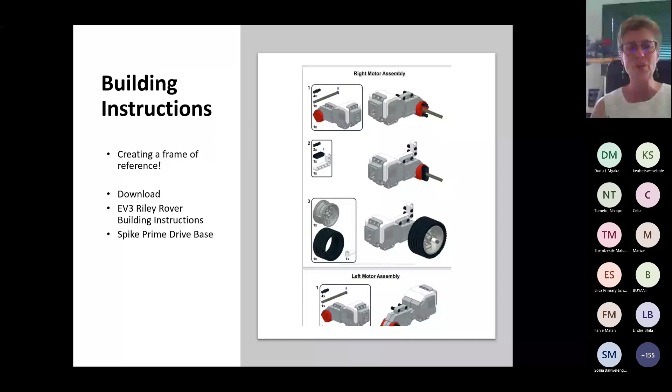All right, so now we're going to build a robot. But for this to happen, we have to assume that you have a kit. We don't want to delay your building enthusiasm though, so we're introducing some virtual design and building tools, almost like a CAD system.

I'm not sure how many of you are familiar with the following: one is Lego Digital Designer. What you'll find is that Lego Digital Designer was used for a long time to teach learners to design something and then build it. But they also used it to re-engineer - learners would design a really cool attachment for their robot, and then we'd get them to put that design into the system so they could reverse engineer their design and have building instructions for something they had designed themselves.

Bricklink Studio is the new kid on the block. And then there's Tinkercad - as I'm looking at this, I'm thinking we need to actually have Tinkercad as a totally separate workshop. I must make a note of that on my list here.

So Lego Digital Designer, you can download it. What we're going to show you tomorrow is a program called Virtual Robotics Toolkit, or VRT - please don't download it yet. I've got a key for you so you can test it, or do a trial version. It's a lot of fun, the Virtual Robotics Toolkit, because you can also play with the robot.

Just to show you around, this is the kind of environment for Lego Digital Designer, but you can also download other people's designs. So Builder Dude 35 is a guy who was a young guy about 7 years ago - he's grown up, and he's a great contributor to this online community. You can see there's a plethora of examples of designs and things you can build.

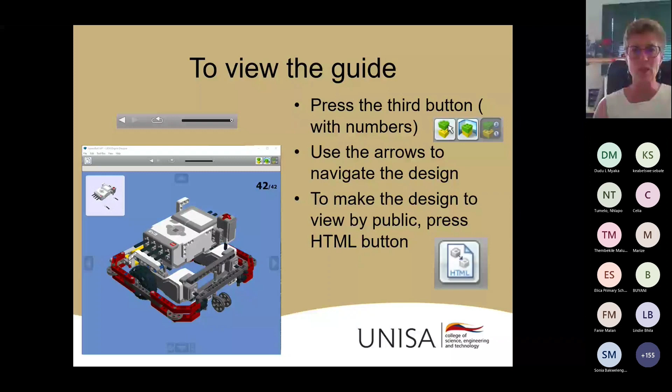So that's kind of what it would be. You'd save it, and then you've got it, and you can share it, and have an example of what you've built. That's Lego Digital Designer, and you can share it as well. But what we're going to demonstrate today, I'm hoping Casper is still on the call, he's going to demonstrate Bricklink Studio.

You can import Spike Prime parts as well, and these are interchangeable, so you can read and write Lego Digital Designer files, edit it, and share your designs. Casper, I'm going to stop here and say this is where we are.

This is Bricklink Studio if you want to go and download it and install it on your computer. This is what Casper is going to show you, how to manipulate electronic things. And there's the Prime lessons - a whole lot of lessons you can follow under Prime lessons if you want more information.

Okay, so Casper is now going to give us a Bricklink Studio demonstration to build a robot virtually. Then tomorrow we're going to deal with programming the robots, the different options. And in the late session, the Unit 4 session, I'm going to show you where to find more resources and how to deal with all these resources without being overwhelmed. All right, I'm going to pause now, and Casper, it's over to you.

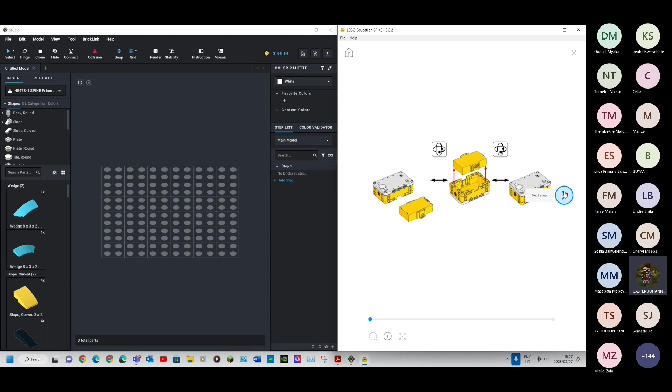So what we're going to do is build a small robot, the driving base one. This is now the instructions that Dr. Gijs was talking about, and all we're going to do is follow these instructions and build the robot. So the first part is we need a horizontal beam. Now we're just going to look through here on the left side to find the correct beam. Here we have it.

Okay, and we can use our mouse to move the screen around as we see fit and how we need to do it and how we want to see it.

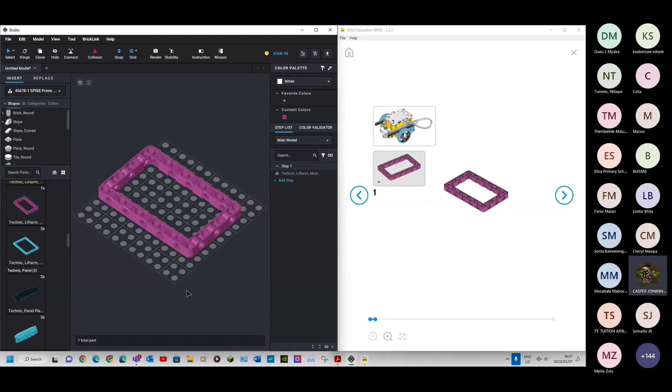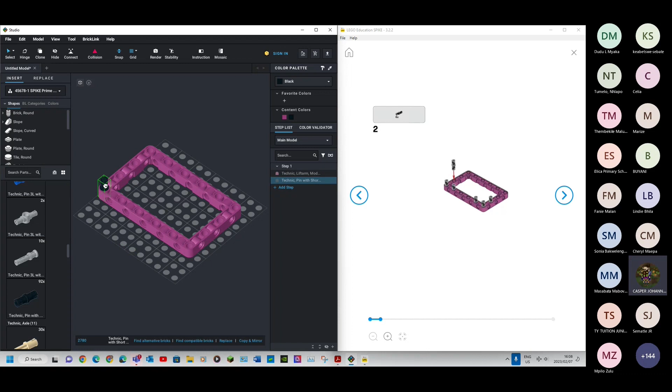So we just press here, and then you will see we have 93 connectors in this set. We just press on it, we drag them, and we use the arrow keys to move it, to rotate it in the correct position. And then all we do right now is we redo this step 6 times as the instructions show us, it needs to be on this side here and on this side here.

Okay, and then also one thing that is nice about this program is if your learners create a robot from their own design and they want to save that design, they can now, on this side, it shows you what that part is and in what step you did it. So you can add steps at each row, at each point in time, to show how we built this robot, step by step.

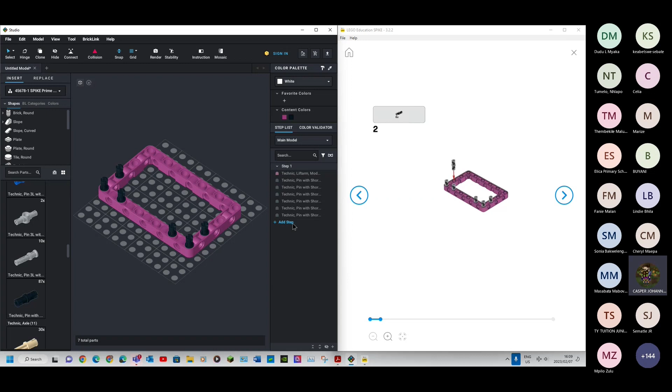Okay, now the next part is we just need to add our motors. And this is another part that all the learners will go on and do in real life with a real robot and with all the pieces. So one person will be looking for the pieces, and then the other learners will go and connect these pieces to each other in the correct positions.

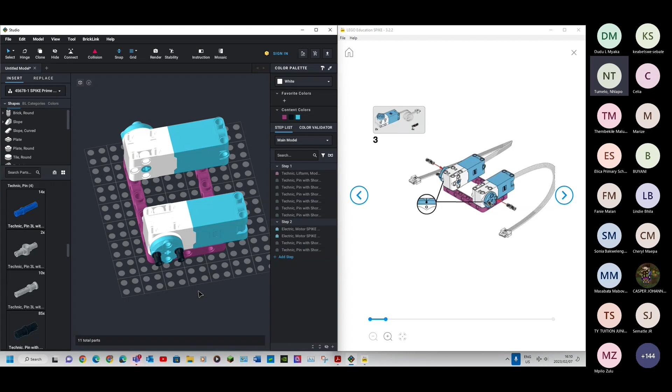No, so what you have to do is we have to press this button here, and then we have to say configure. And then we have to go and look for the number of the set that we want to use. So for example, the Spike Prime is 45678. So then we go and say choose a new palette, import from an official Lego set. And then we just add that number that we just got. And then it will show you, after it's loading, what that set is. So it shows me it is a Spike Prime. Press on it and we import it. Import. All right, and then it shows you if there was any problems downloading that program or not. All right, sweet.

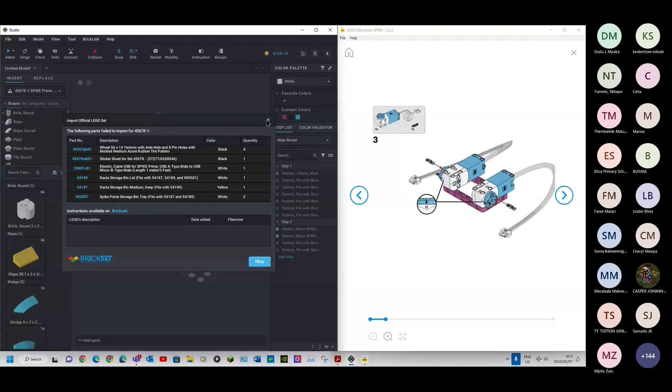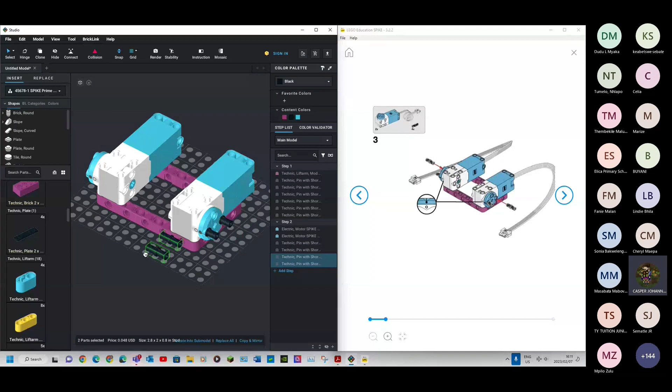Okay, so there are a few shortcuts that we can use. We can use the control key, and then we can select multiple parts at the same time. And we can say Control C to copy and Control V to paste. And then we can select multiple and connect them all together at the same place that we want to do, because we can see they need to be in the following spots.

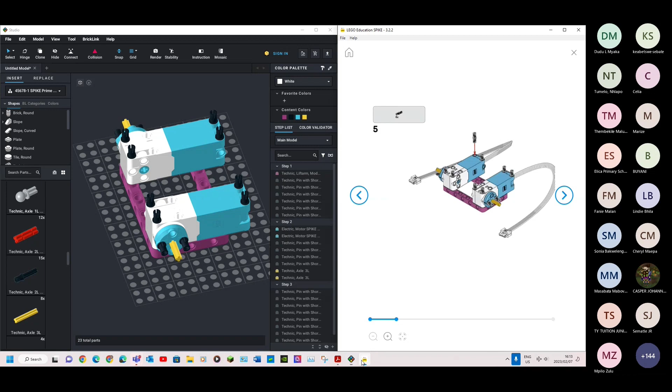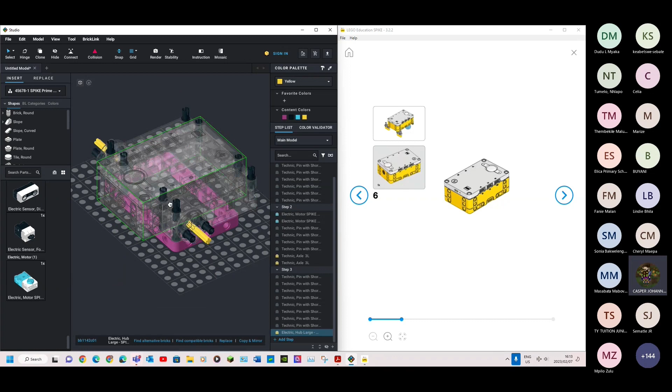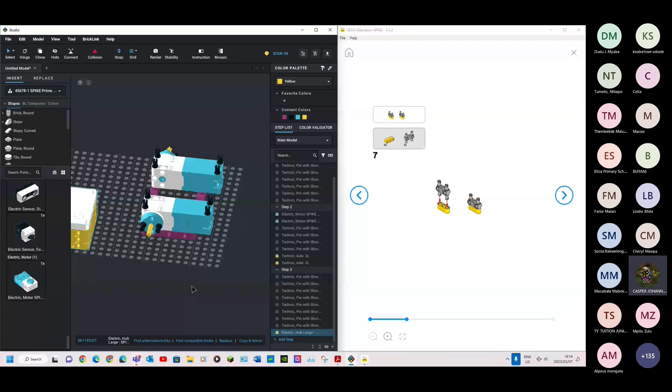Go ahead, pleasure. So we just continue following the instructions. This is just for if you don't have this robot at the same time, we can continue pasting it. This is also nice about this program - it shows you cannot place the robot there because it's conflicting with something already in that spot. We need to try and put this part here. So the next step is we need to start with the other side of the brick. I'm going to move this to the one side of our designing table and get our robots underneath.

Okay, so the next part is we need 3 beams with 2 special connectors. Let's find those, okay, correct while you pass here. Looking for those 3 beams with 2 special connectors, I see Hlingiwe's hand was up. Go ahead, Hlingiwe.

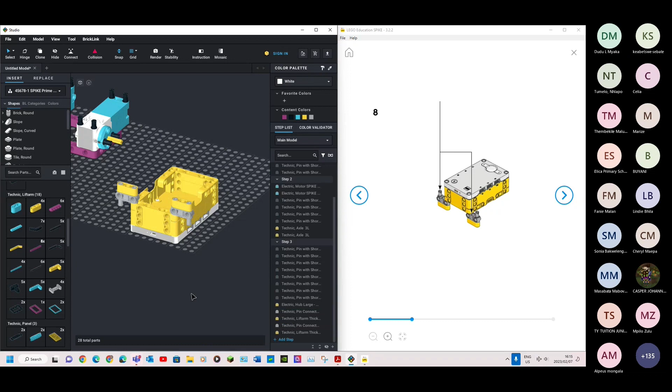Oh okay, so that one you get on hands-on technologies. Okay, okay yes, I'll put it in the chat. Thank you. All right, you can continue, Meneer Johannes.

Thank you. So now I'm selecting - I'm using, because of my experience, I already know I can see there are a few parts that we need to move. So what I'm doing is using the control function and selecting multiple parts, copying them and pasting them into their correct positions. When you want to select multiple, you hold in your left button and select everything, and it creates a square and selects everything in that area for you. Then you can see how it needs to go. So the next part is we need to add another beam with the caster ball for maneuvering.

Is there any questions so far on this software? So far so good.

You did indicate that - oh wait, let me go to the chat box. Sorry, I see there's a chat saying our 4-year-old is watching with me and getting excited, it's Legos. Thank you so much for that. And I see P. Muller says, can you use BrickLink Studio as a virtual substitute for robotics kit until you are able to get the actual SPIKE Prime kits in class?

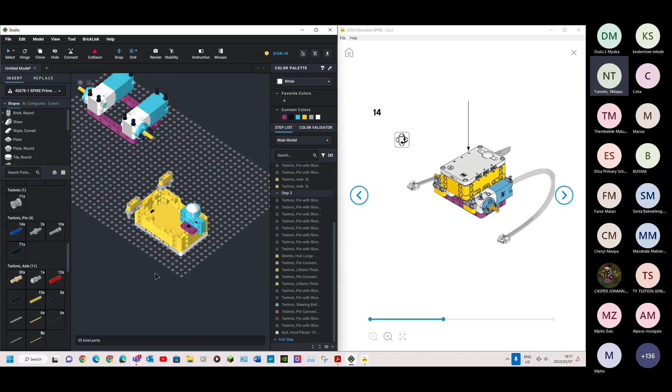Yes, definitely yes. And I see Wiseman Ngobo says, is it possible to write down those instructions starting from downloading Bricklink? I think it's simpler, Mr. Ngobo, because you simply use the link that Casper indicated and then you can take it from there. It's not a train smash, but let us know if it's difficult on your side.

And I see Zintle says unfortunately on my side the screen is black but I can hear Casper clearly. So for the likes of Zintle and others struggling due to network connectivity, please note the recording will be shared tomorrow on the YouTube link.

And then I see Penny says, is Bricklink free or is there paid content? Yes, so it is free to use, and the nice thing about it is if you search online by going onto Google, you can get multiple designs that you can open in Bricklink to see them.

There's one thing I want to maybe add. If you go underneath the main part, it shows you all the different Lego parts that were ever created. So you can even search something like a figure, and then you can create your own Lego men - it shows you how, for example, the small headed one. You can create your own figures and any other Lego pieces you can think of. It's lots of fun if you want to play around with it.

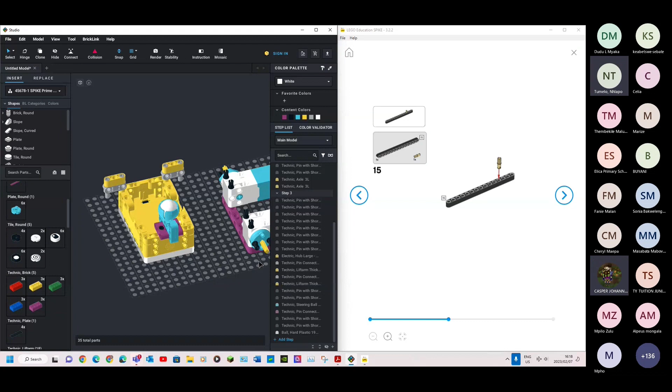Okay, so the next part - I just wanted to show you all. The next part is we need to take the rig on this side and move it over to the side on the right-hand side onto the 2 motors. We'll just make this a big screen.

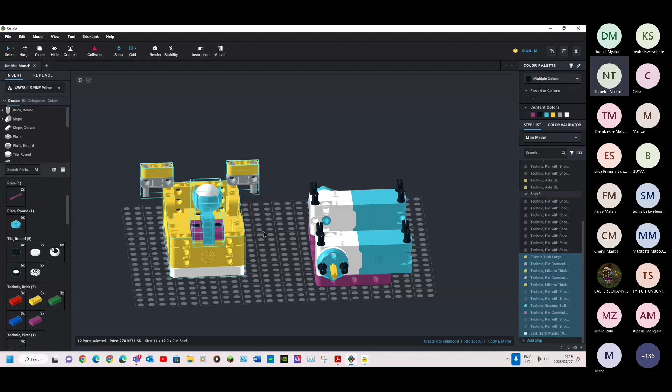Okay, while you're creating a big screen there, I see Dr. Kho's hand was up. Okay, yes Doctor? I think it's also important, Casper - Casper's now building a robot, but sometimes the learners also need to get used to building attachments.

Building a robot is really exciting, but there's more to it than just building a robot. You can build attachments, passive attachments, powered attachments. There's this whole range of designs that learners can grapple with, and each can grapple with their own design. The application is immense. It also gets learners to think in 3 dimensions.

Thanks, Casper. Carry on. Sorry.

That's fine. Plus, the one thing that is also nice is you can have an entire digital library of all your old robots. If you want to remember how you built that robot, or if there was something special about it you wanted to remember, you can take this program and create your own entire steps on how you built it. You can even add comments on what was this step, or anything you want to remember about that robot, or any special attachments you created that worked extremely well.

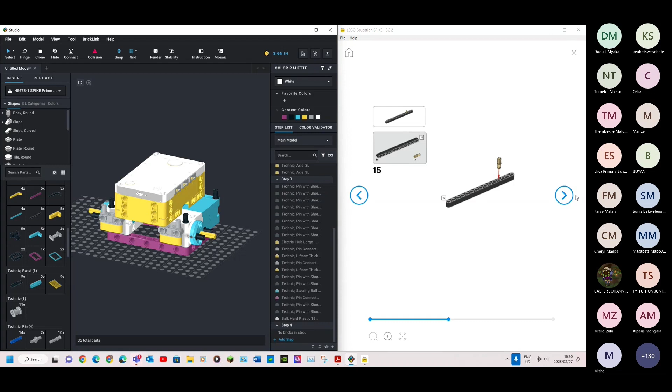The only thing I'm going to skip now is the wiring, because this program doesn't show the wires, unfortunately. So we're just going to skip those 2 steps.

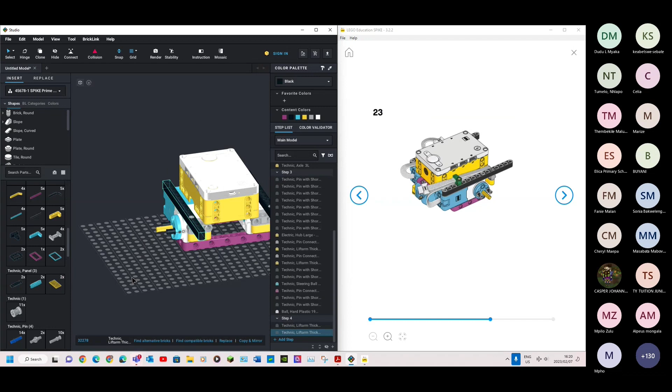The only thing we still need to add is our wheels, and then our robot is done. There we go. Easy peasy.

Thanks, Casper. Well done. Woohoo!

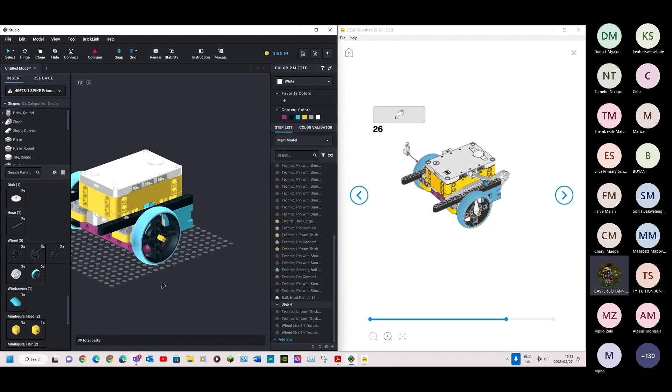And this is now our robot, a small robot that we just built using the building instructions. And then we can find it, and then we built it now.

Now the most important part of every single programming, or even in real life with our computers, we need to save our program. So we go to File, Save As, and we say this was the drive robot, it was just the drive. And then we save, and that program is saved forever.

Then we have our small robot that we just built.

Awesome. Awesome. All right. Thank you so much, Meneer Johannes. You wanted to say something, Dr. Gous? No, I'm just inspired. It's just so easy. All right.

Yes, Meneer Johannes, can I recap a bit? Yes, I was just going to show you another robot while you recap. Continue. All right, so from what you have taught us here is that you can simply go and download BrickLink Studio for free. That's number 1, yes?

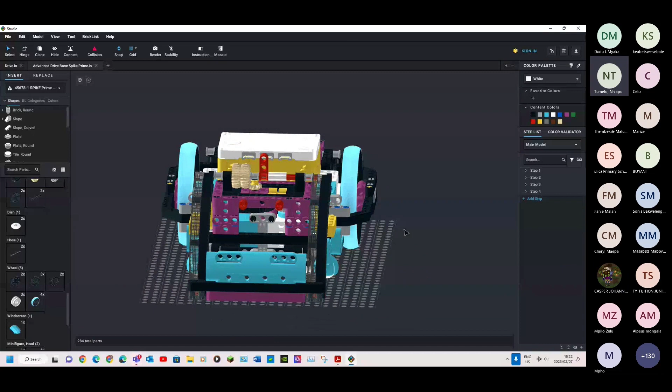Yes. And number 2, you said in order for one to have SPIKE Prime on this software, where do we get it?

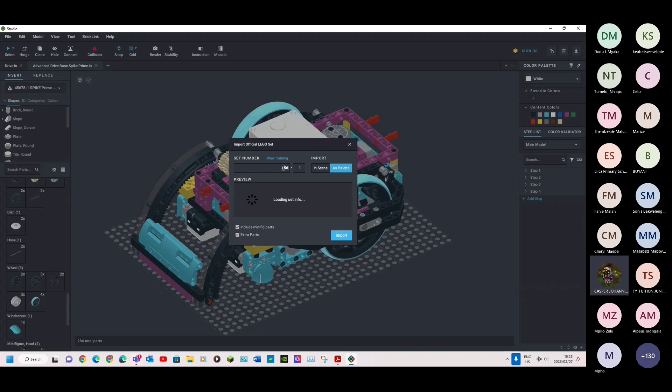Okay, so what we do is we Google this SPIKE Prime, and then we get the number, 45678. Then we just go here to configure, and we say add a new palette. The next part is import an official Lego set. Then we enter the number we want, 45678. And then we'll get the entire set. You don't even need to enter the 1 because it's always there. We just say import, and it will automatically import your entire set into this area here.

And we just press on that button and it will take us straight to our set.

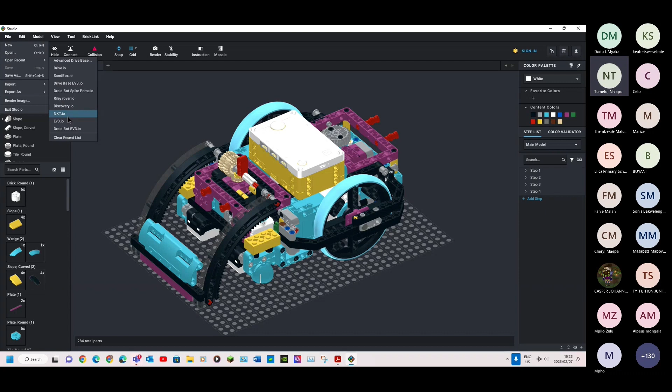All right, do you have any questions regarding Casper's presentation? Or otherwise, Casper, you can continue in the meantime.

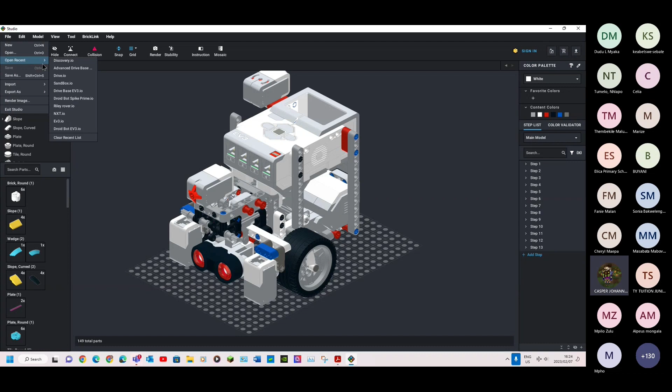Yeah, this is, for example, one of the EV3, one of the previous robots that we can just take. I think I still have an NXT. So one of the first robots that were built of the first sets here we have, and we just got it right to take the design of that robot and convert it into an electronic file so that we can always remember how to use this robot or how it was built.

The robot's name is Mozart, by the way. Yes.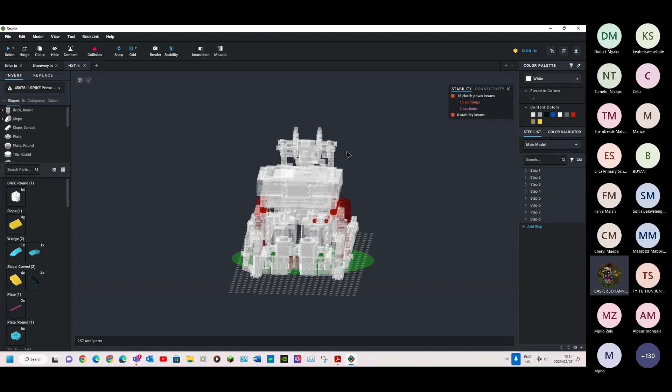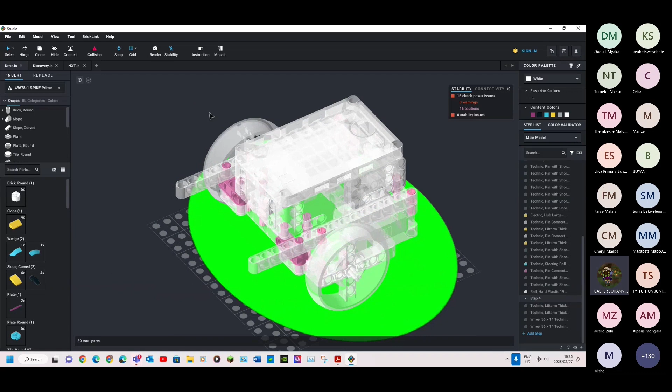Yes, and then also we have multiple functions here that we rarely use. For example, I wouldn't suggest a person very new to Bricklink use the render or the stability button, because the stability button will just check for you where the stability problems are in your robot. For example, it sees a problem with the wheels and some of the connectors, but with the robot we just built, it doesn't see any problems with stability. The render button is just to create photos, but I really wouldn't suggest anybody use that button because it does take a lot of your PC's computing power.

And unfortunately it's very draining. But otherwise, the only ones that you would use is either the Spike, or if you want to use the EV3, you can type in 45544 and you'll get the core set for the EV3, and 45678 for the Spike.

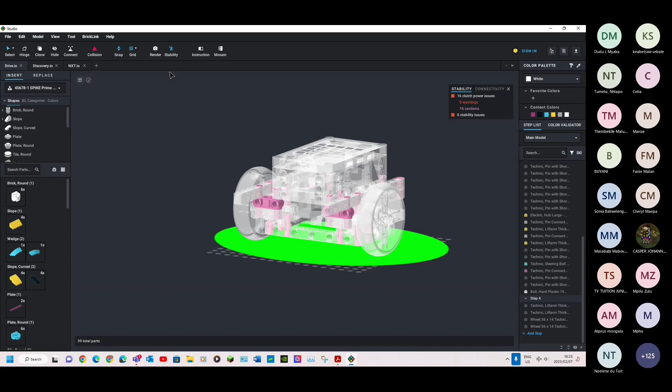Hi, it's Pio. I just wanted to find out if it is possible for one to get this software on a phone, or is it only on laptops and computers? I only know of the computers and the laptop, unfortunately. I don't know if it's on the cell phone yet for the Bricklink, but the programming for the robots is on the cell phone also.

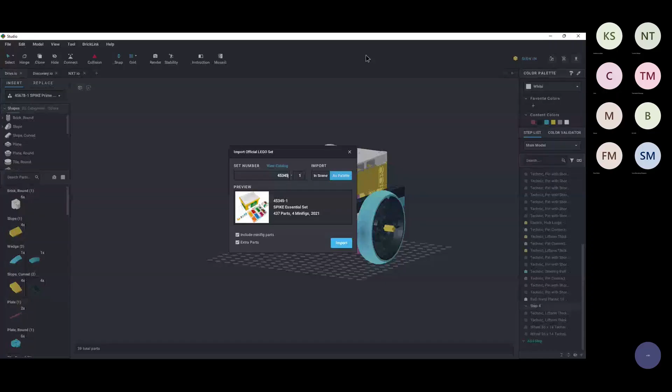Let me just share my window. Can you see my screen? Yes. Okay, so if you type in this, it will give you the Spike Essential set. Yay, all right. So this one here is just to show if there was any problems with some of the parts, but luckily none of these parts are at the moment essential for us. So if we go here, on this side, we will see, let's see if I can make it bigger. There we go. So these are all the parts that the Lego Spike Essential set has.

Yeah, so it's even these old Legos that I have known for all my life, and then we can even add them here as we want.

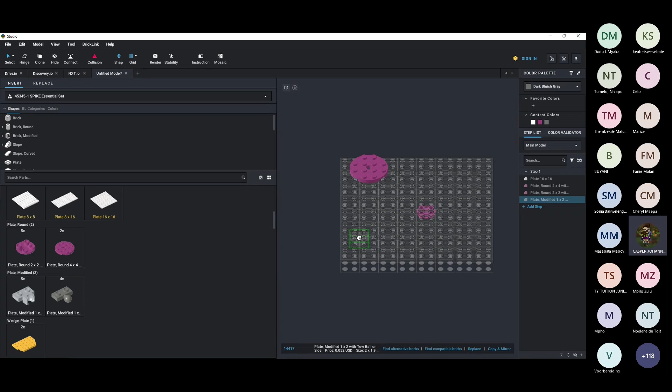I did see somebody ask in the chat, what if you make a mistake, or does the program tell you if you make a mistake? So what happens is if you put one of the pieces into a place that it won't go, for example if I take this one here, it becomes completely see-through. This is the warning system that you are placing a block in the incorrect place. So then we just change it to somewhere else, and it will automatically replace it to somewhere that it needs to be, to the correct place.

So Casper, can I just want to show you quickly for the WeDo set, the little brain is about so big, and then you get all the motors. Oh, it's flashing at me. And then you get all the little motors, and the motors are plug and play, so it clicks into place. I feel like an ASMR. It clicks in here and then it goes click. Here is the motor, and here is the two motors and the brick. There we go. Oh yeah, and the battery. It's inside. All right.

Excellent. And here are the small Lego men that we can create for ourselves. We can mix and match them, and we can also change anything - that's the fun thing about when we create these robots or use this program. We can change the color of any of the parts. For example, we can make this bright yellow, or we can make this one like this.

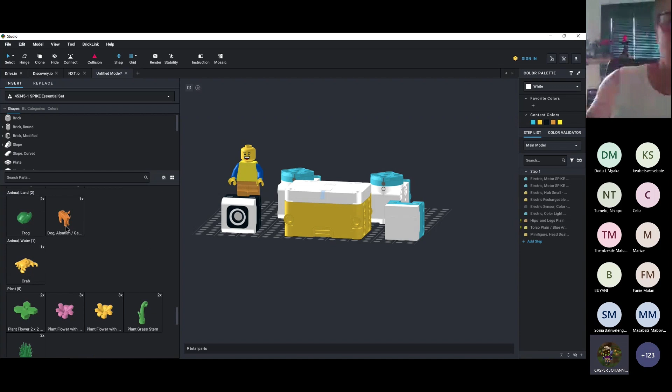And it's one of the fun parts about this. It is lots of fun if you just want the learners to go explore, and you can create a lot of fun with this one especially. It's about model designs as well.